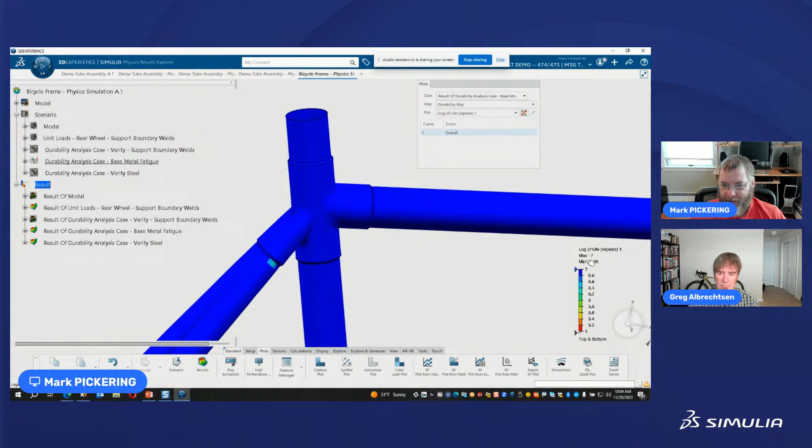And we just do a base metal fatigue analysis of it, and we get a little region here. That's the only region that actually lights up on this particular connection at all. In here, I've already scaled the contours so that 5, and we're looking at log of life. So 5 is what, 100,000 cycles. So what does that mean, log of life? How do you interpret that?

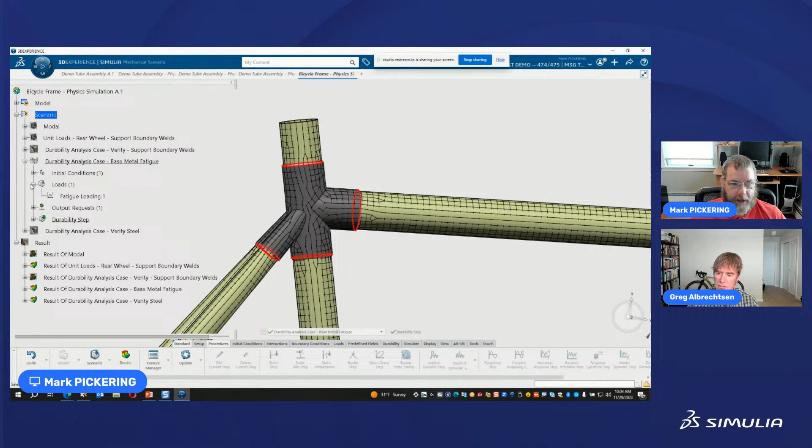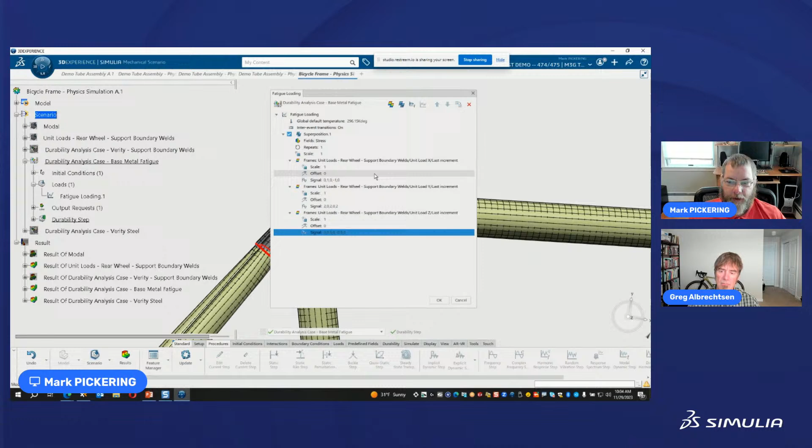Yeah, so that gets into a little bit of what the load case will be. If I come back here into this scenario and bring up the loads, we've got the fatigue loading. I've got a particular event cycle, which has one load case cycling through with this signal, another load case cycling through with another signal, and another load case cycling through with a third signal. You can see they all have 1, 2, 3, 4, 5 data points, but they vary in X, Y, and Z.

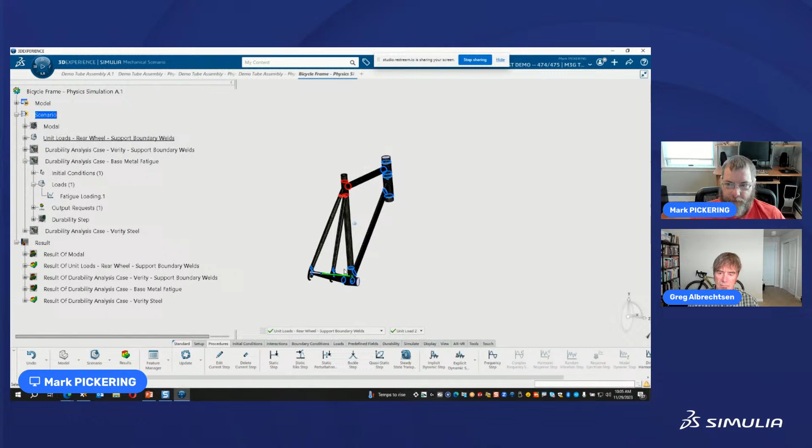So if I zoom this out a little bit and go back to the unit loads, I've got a load in X, and if I switch to Y, we've got a load in Y, and then a load in Z. These are the basic FEA load cases for which we have just stress and strain within the model. What I've done is taken the approach of assuming we'd actually gauged up this rear axle of the bike, done some particular event like driving down the road, going off-road, doing a jump, or whatever you're interested in, and tracked that data as a time history of what happens in the X force, the Y force, and the Z force.

And so when I go into the durability and look at this thing, I'm saying, okay, this signal - I actually just typed in these numbers, but it could have been that data trace. And then I'm saying, okay, so we've got the X force on this rear axle. That's all of these frames. And this is what we're calling superposition.

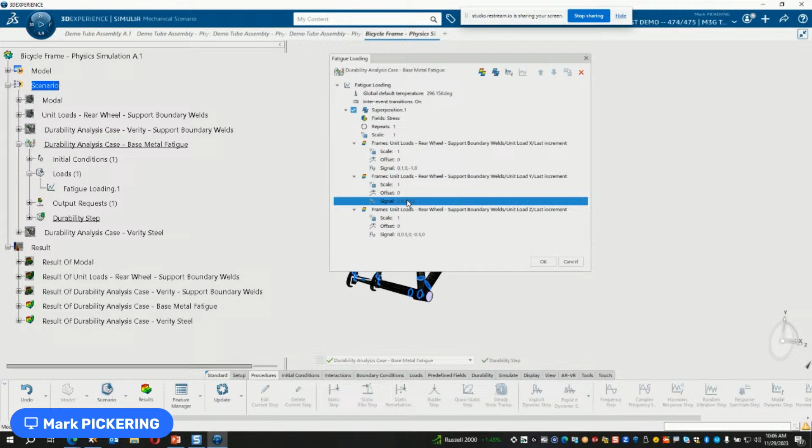So this is going to be applied and is going to multiply by that unit FEA stress. And then I'm doing the same in the Y direction, because obviously we recorded X, Y, and Z all at the same time, we've just pulled them out into separate channels. So here we're just combining each of those channels with the stress value for each of the unit load cases. Each one relates to a different static case over in the simulation tree.

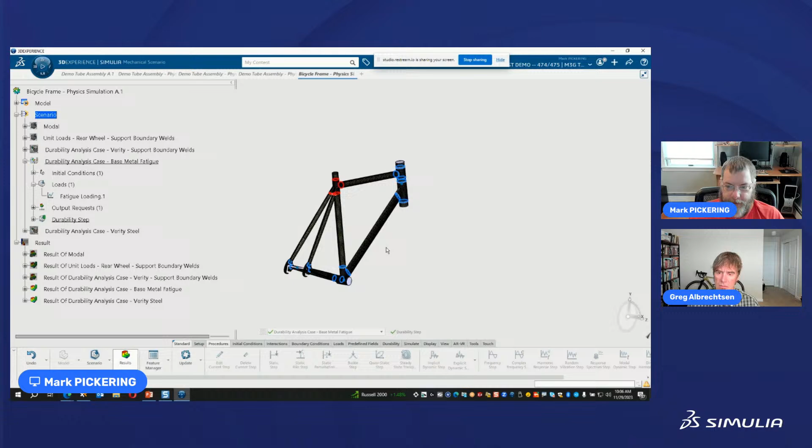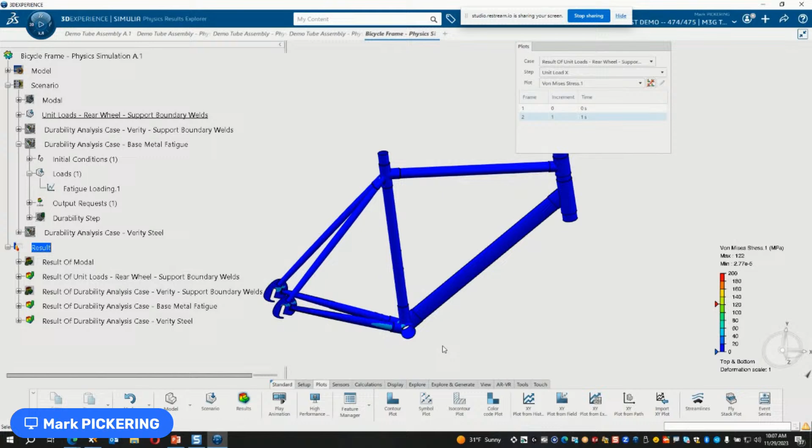Okay, so if I go into results again, we can actually look at those. We've got a Z load here with a particular stress on this. We've got a Y load with a particular stress on there. Seems like it's concentrated on this area, so no wonder it's not causing a lot of damage here. And then an X load with some little concentrations around these particular bits. So yeah, just regular static analyses that we've combined together, and when we then go into the fatigue loading, we're putting these together. Here it's just 5 data points, basically a sinusoidal curve, fully defined.

And do those have to be like a static perturbation, or can they be nonlinear with nonlinear geometry? So it depends. A lot of fatigue analysis that we typically look at tends to be fairly high cycle. So here we were saying we wanted 100,000 cycles. If you're repeating something 100,000 times, it tends not to be very nonlinear in terms of the material.

So it does tend to fall into what would be a linear analysis, a linear perturbation analysis. As you get into lower and lower fatigue, then you will tend to get a little bit more macroscopic level plastic straining going on. And so to do that, you would actually want to have an analysis that went through one cycle of that and was a fully non-linear static step.

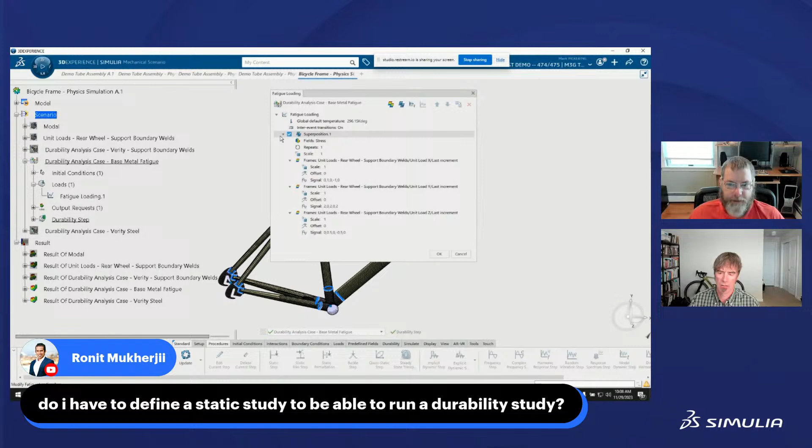And we've got 2 options here. At the top, we can see, in this first block, I just made a superposition, which was the X signal, the Y signal, the Z signal with those unit load cases. I could also go in here and do a sequence of frames and say, okay, if we'd had, say, a dynamic event which was actually fully non-linear and did develop a certain amount of non-linear plastic straining, we could come in and say, event 1, all increments, all except.

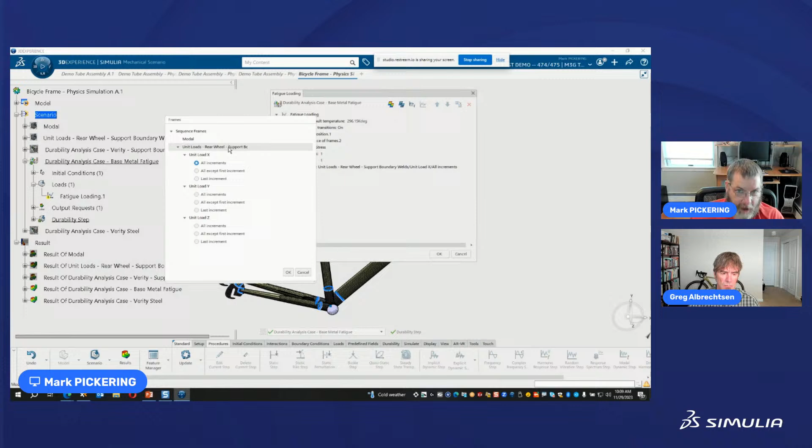And what we're doing here with a sequence of frames is we're defining a loading event, which is a bit like an animation you'll often see, where it goes frame 1, frame 2, frame 3, and it's cycling through those to form the animation, and you can see whatever the thing is deforming. But we're actually tracking that from a damage perspective in terms of accumulating fatigue damage.

So we could go ahead and do that, and this is getting now a bit - we're getting way off topic for what... see, we're not even 10 minutes into it.

So we do have a quick question. Keeping me on track here, not encouraging me to go down.

But I will get into this, so we'll carry on down this rabbit hole. It is kind of important. Basically, the theory of what's going on in fatigue analysis can be quite complex and can be quite involved. People spend their academic life just studying this stuff. I'm not one of those people. I'm more of a user, and I want to use the clever stuff that they've done to be able to drive an engineering decision on, should I go for bike frame A or bike frame B?

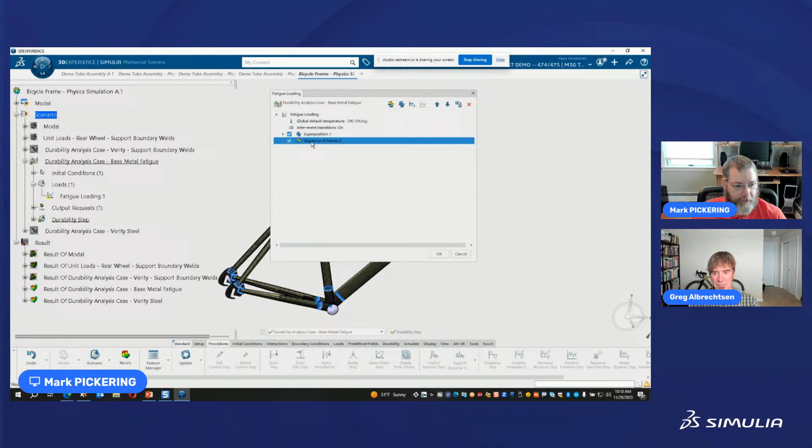Which one of these seems like the better one from a fatigue perspective?

I do care a little bit about the theory, I do care a little bit about the understanding so that what I do actually works, but I care more about how do I actually put this into the software and use it.

We know the whole adage of garbage in equals garbage out, but the software is so good nowadays that as long as you have a good engineering background and you're thinking about what you do as you go through, it can do a lot of stuff that you have limited knowledge on.

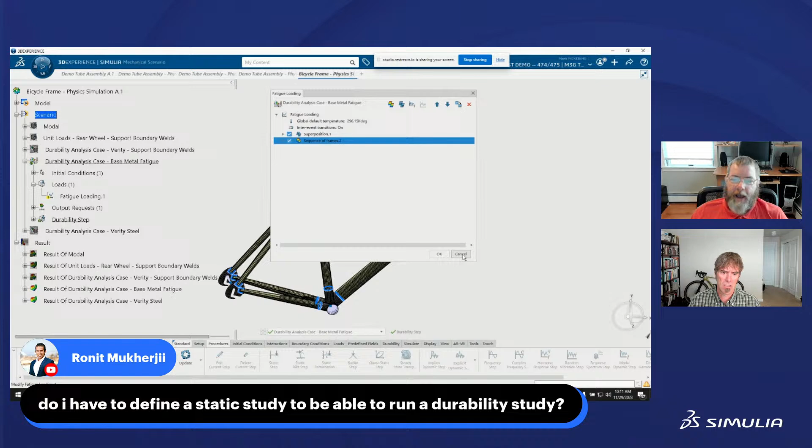We do have a question from one of the people, and I think you may have hit this. So can you just directly define a durability case, or do you have to define one of those other cases first? Let's hold off on that question just for a little bit, because I want to do this bit first and then we'll come to that bit second. Okay, carry on, back on track, back down the rabbit hole.

So what I wanted to do here was, we've seen in here, I just put in this second sequence of frames, and we call these blocks. So we've got a block here, which is the superposition, which is the XYZ combination with these signals. And these signals could have been a data file instead of just typed in, and typically that's what you would do if you had test data. But this superposition, for instance, we could say that that is

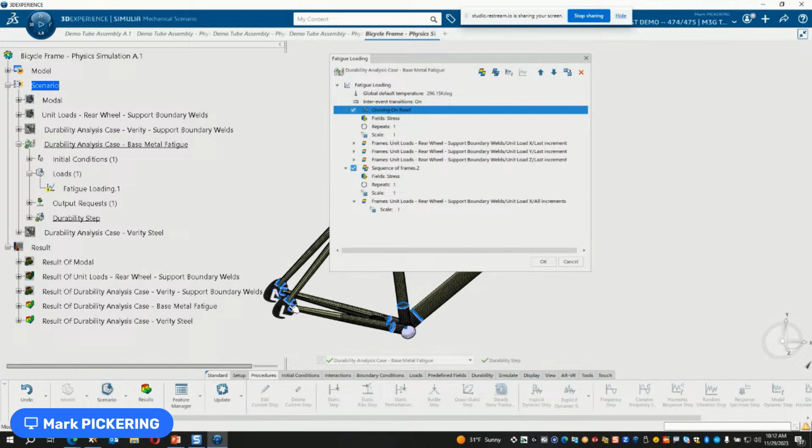cruising on road. And this might be like an hour's worth of test data where we've been monitoring the XYZ of what happens with this rear axle going through this, somebody cruising on the road. And then this particular one could have been something different, where maybe this was, let's say, a bunny hop jump.

And in here, we've actually simulated it inside the FEA, it's not taken from test data. We could have test data and going through these things, but this is where, as a user, you will tend to spend most of your time for a fatigue analysis.

And this is like, what, 10 minutes in just to get to your first question. You asked about what does log of life mean when everything repeats. But anyway, so what this is doing is defining our history. So we could have like an hour of cruising on road, 5 bunny hops, 25 minutes of off-roading, whatever, something

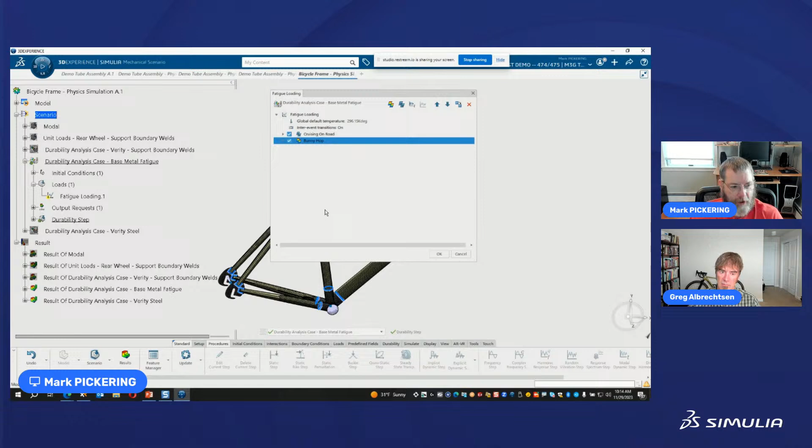that defines a particular load cycle that we want to analyze for, and we want to define the durability for. So if we've got an off-road bike, maybe there's less cruising on road and more off-roading, and if we've got a road bike, it would be vice versa. But the idea would be you'd set up a particular set of load history. Often it's done for like a mile, or for an hour, or for maybe the actual design life of the structure.

And that would be all of this history that we're going through is what we will calculate the damage for. This is probably going to complain about being out of date. Oh, no, it hasn't, excellent. I must have cancelled that.

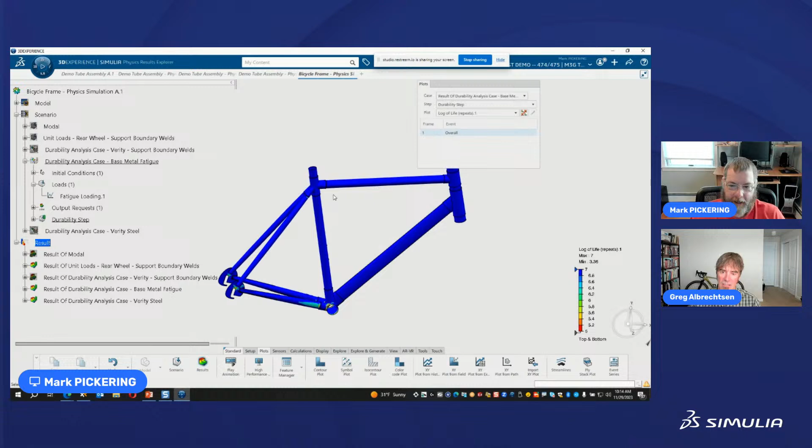But then when we come into this bit and we said, okay, we're looking at the durability, this bit at the bottom obviously lights up the most, but for here, we're just concentrating on the top.

And then I said, we set this up for 5 as a log of life. So 5 is 10 to the power of 5, so 100,000 cycles. Just remembering my basic math. So 100,000 cycles is what we're looking at.

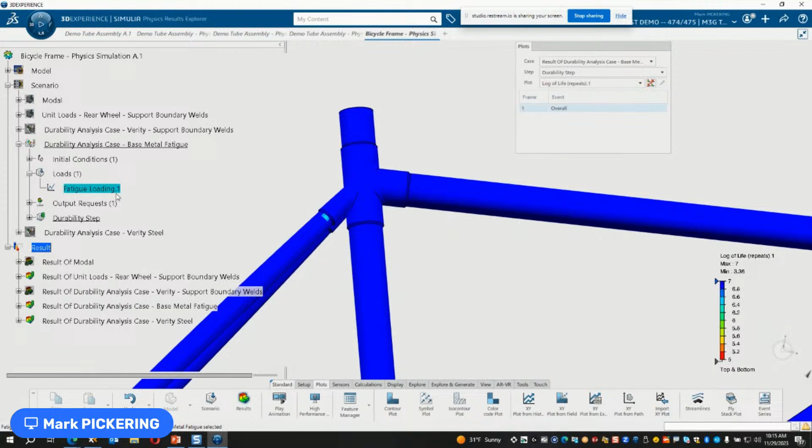And it's 100,000 cycles of that fatigue loading that we defined back here. So in this particular case, it was that 5-step cycle in the X, Y, and Z loadings that interacted in some particular fashion. But if that had been an hour's worth or a mile's worth of riding, then this would be 100,000 miles worth of riding is what we're aiming for as our design life.

And we would look at this from a base metal fatigue and go, yeah, it looks pretty good. That's maybe, what, 6.5 here? Again, in log of life. So we're talking million plus cycles.

And this is kind of getting to where I was ending up with: if we actually weld, you can analyze this, because this is just FEA, as base metal fatigue. You're just applying that algorithm and setting it up here. We do actually have in 3D Experience this Verity approach, which actually looks at the welds, and welds tend to be detrimental to the fatigue life.

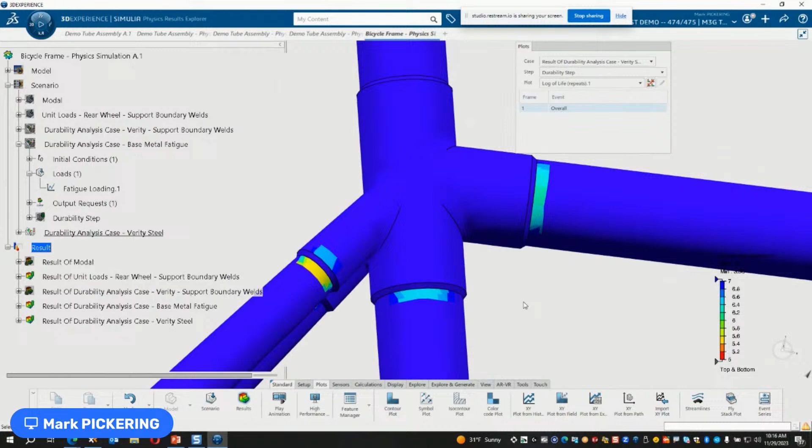So this is what I wanted to show initially, where we've done exactly the same thing here, but I swapped out and included the Verity calculations. And we can see that the life has dropped significantly. Now we not only have this one point that is below 7, which is typically infinite life in these analyses, but we can see other locations lighting up too. So there's more areas of concern as a weld, and now we're dropping down to 5.4, 5.5.

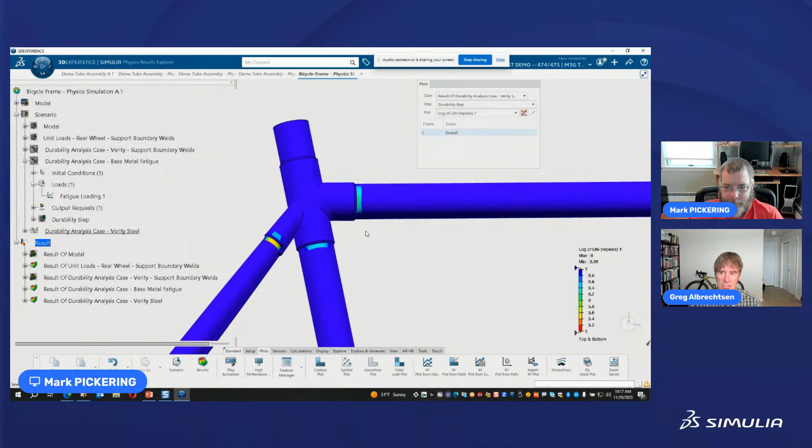So this log of life value, if I remember, is like a log-base-10 criteria. So if I have 10 to the x, that's what that number represents. That number right there is the x. So if I really want to understand the cycles, I do 10 to the x, like 10 to the 7 or 10 to the 5, and that will show me what my number of cycle predictions happen to be, right?

Yeah, this is maybe a bit of an artifact of the way people who study fatigue deal with this. With fatigue you're typically looking at very long lives, you're interested in 1 million, 10 million, 100,000, 10,000 cycles. Plotting those out on a graph in true scale, you just get swamped at the end, but you're actually interested in how it develops over those orders of magnitude. So they tend to look at it this way, and because a lot of that comes from the theory, this tends to be the default way we look at it. But you're right, 5 here is 10 to the 5, so 100,000 cycles.

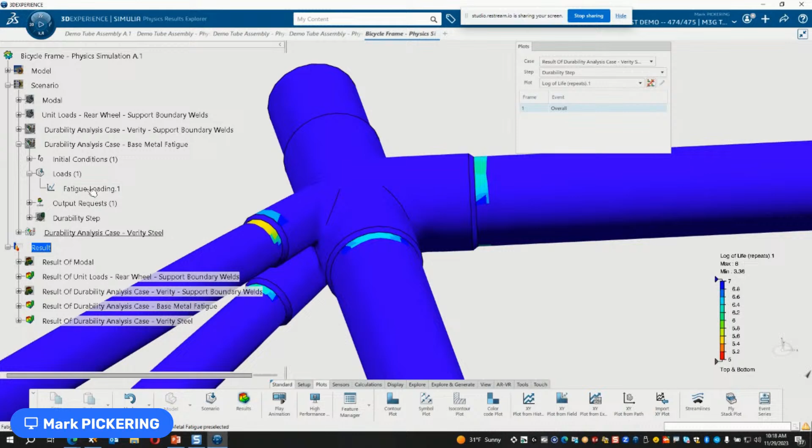Okay, back on track, out of the death spiral.

Getting to 6 on this green level is 1 million cycles, and 7 is 10 million cycles. So that's the way to think about it, and each of those cycles is that fatigue loading you defined. Okay, so this was the first thing I wanted to say, and we probably won't get to why welds are bad, but if this is of particular interest, the main takeaway is that there are techniques in the software which account for the damage changes that having a weld in the structure causes, and they reflect what's actually going on in the practical sense. It's a word of warning that if you have a welded structure and you're just using a base metal fatigue algorithm, first, I admire that, it's good, it's definitely better than just doing an FEA and looking at stress. But secondly, it's not quite the whole picture, you're still missing a change in the damage mechanism that goes on with welds. But there is software that can do that, and coincidentally, 3D Experience is one of those softwares. Now that's kind of the wrap up of that first bit I wanted to do.

And then I said we'll leave that question for the second point, and I've forgotten what that second point was. Surely you hit it already, so I think we're good. Are you telling me you've forgotten it as well? Oh, dear.

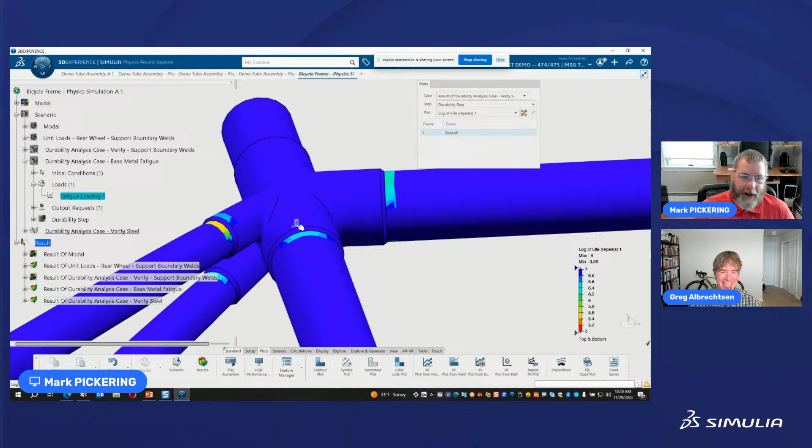Oh, it was about setting this up. Okay, yeah, let's do that. Let's do a bit of setting if you have to set up some sort of simulation case beforehand. Yeah.

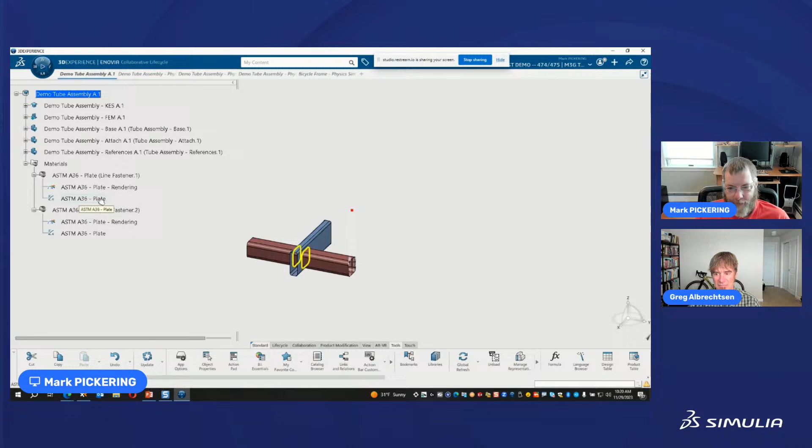So the first thing I'll do, again, we're skipping a lot of stuff here. One of the nice things about the way that fatigue is handled in 3D Experience—and I mentioned the theory can get quite complicated, the concepts involved can certainly get quite involved—I said I'm more interested in a user perspective. The main thing that you need to be aware of, apart from setting up the load history, is that there is a material database supplied which has fatigue properties in there.

That can be a little bit surprising for a lot of Abaqus users, because historically Abaqus has been very much just the finite element framework, and people had to bring their own material data to it and populate a material library. With fatigue, there's just less generally known information about fatigue, and certainly less information about representing it in a strain-based approach, which is one of the things that FE-Safe and 3D Experience have, which we may or may not get to later.

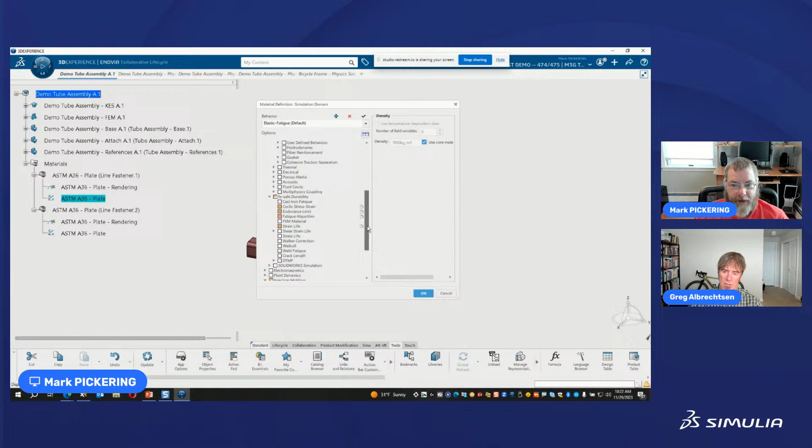But the nice thing is, from a user perspective, if you load up that library of materials, it will have the classic elasticity, the Young's modulus, the density. But then if we scroll down here, it will have what has been predefined—seems to be the best way of representing that material based upon the fatigue expert's perspective.

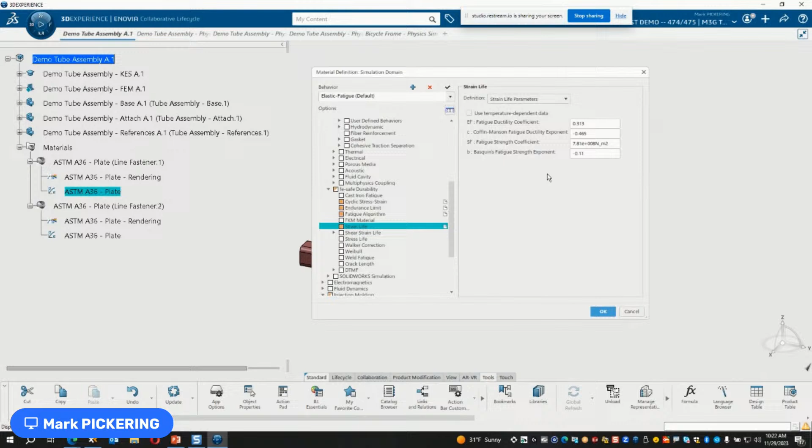Often it will be something like this. So we go into the FE-Safe durability. In here, we can see that we're doing a Brown-Miller. We're not going to worry about all these details. The key bit I want to get across is just that the algorithm that we're using has been predefined, and then the coefficients that define the use of that model have been predefined and populated in here. So from a user perspective, all you need to do is use that material in these parts.

So we can see here, there's that material being used in this base tube. And I have to plug really the power of 3D Experience right here. There are so many things that we get in 3D Experience as simulation users that were put in there with simulation in mind, but really just the whole database concept of one source of truth. With other software, you have to import the material and recreate it every single time. But here in the database, there's one material and everybody gets to use that same material—you don't have to go in and recreate it. And that works for everything in the database, but materials in general, it's super nice and really powerful.

So then you don't have like 40 7075 aluminums out there in the database, and you're like, I don't know which one's mine, I'm going to go ahead and recreate another one. You can just use the one that's been put in there and start using that. So anyway, all right, carry on.

And I'll say as well, coming from an Abaqus perspective, as well as other FEA software which typically is unitless, the fact that you're working in a unit system and you don't need to care about that—because the material has got a particular unit system in here—and the program does the conversions on the fly that it needs to. If you're working in imperial, or if you're working in metric or millimeters, that is just really nice.

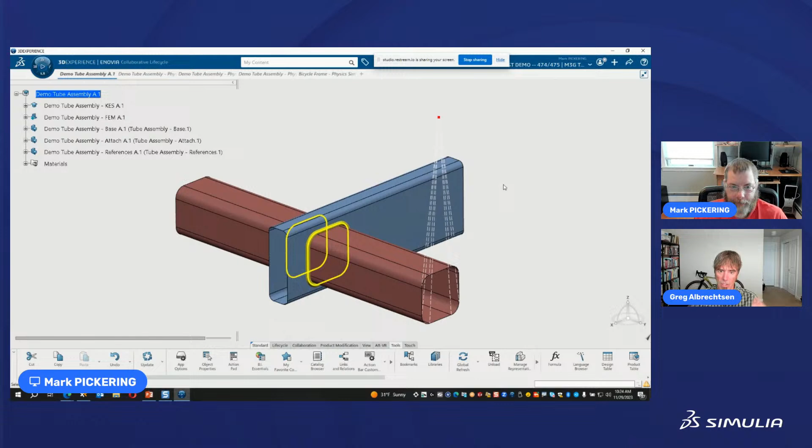And you can even—so the base units of 3D Experience are SI, right? That's the base units. But then we have what I refer to as display units, and you change those in the preferences. So if you want your display units to be inches or millimeters, you can change that in your preferences. But if I'm working in my millimeter display units and I know something's in inches, I can just type that in and say inches, and it'll automatically convert it to millimeters for me. So there's all this smartness going on behind the scenes with units.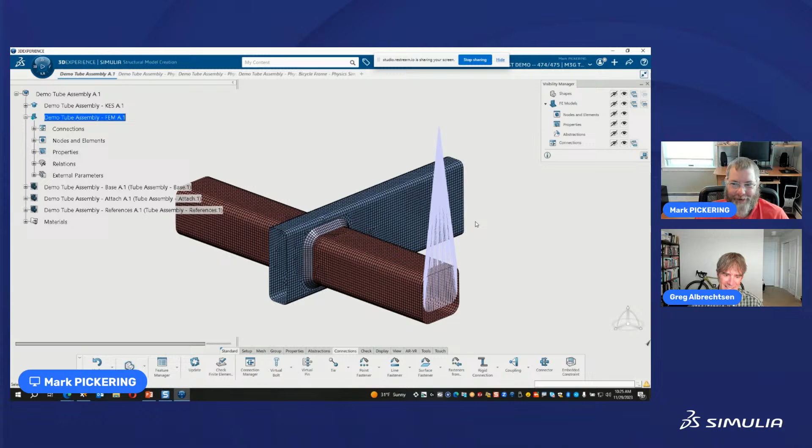So for the unitless world out there, it's a huge game changer. For us that are used to working in CAD packages, we're like, yeah, well, whatever. Blatantly obvious, why wouldn't you do that? Yeah, all right, but yeah, so what I wanted to do is showing.

Okay, let's get into a bit about how as a user do we set up a durability analysis. So I've got here what was a solid model that I've mid-surfaced out, and then I've used line fasteners here inside 3D Experience.

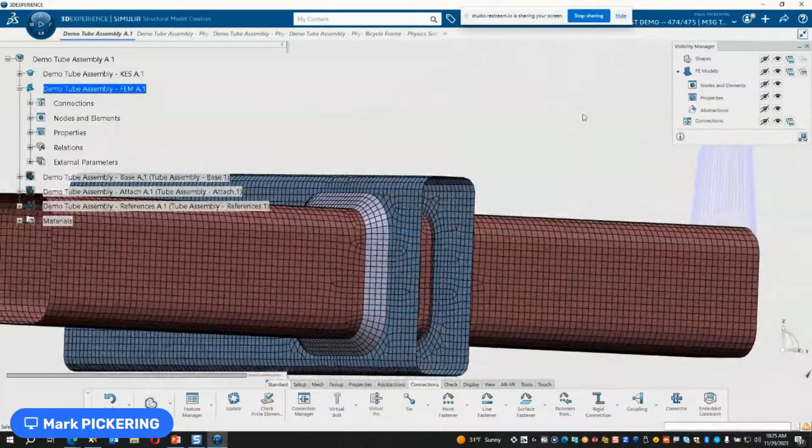To connect these together, these are the sort of purplish elements. And if I do a free edge plot, we can see it's fully connected.

So we've got an attachment tube, we've got a base tube in red, we've got this abstraction to a loading point up here, which is where we're going to put a load in to then stress this structure up. And then we've got the line fasteners representing the welds here to go in.

What I'll do is come in, so here I've got a physics simulation. In this physics simulation, all I've done so far is set up the FEA. So if I come into here, we can see that I have got... where are we?

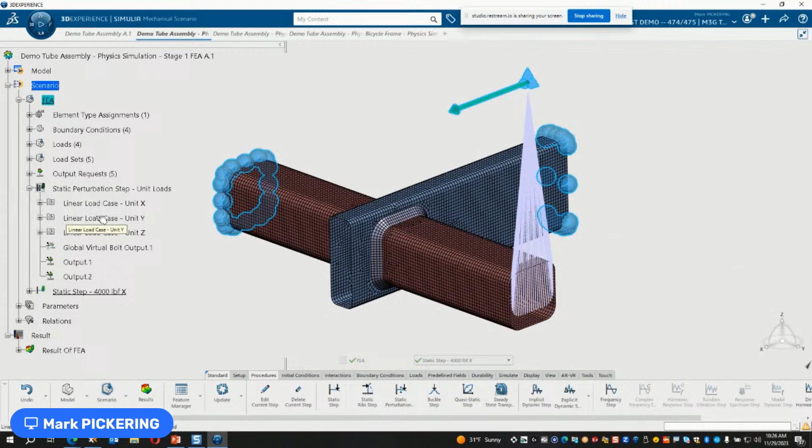I've got, actually, so talking about what you mentioned before about does this need to be a linear static or can this be linear static? I actually have in here an XYZ unit loading situation of a linear static perturbation set of load cases.

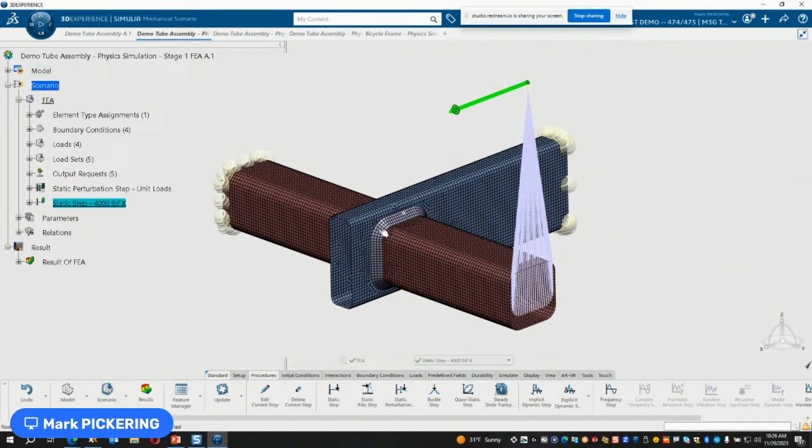And then I have what we're currently displaying, which is potentially the non-linear, but is actually just, you know, we're applying 4,000 pounds force here, and then that's going to create a twisting and a shear motion in here, stressing this up. And so if I go into this, we can see, okay, so this is our stress and strain, or our stress plot.

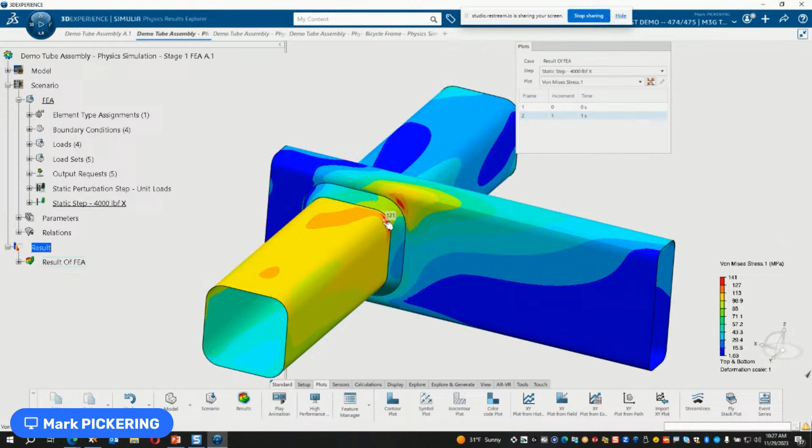In this particular setup, we're lighting up this sort of free floating section first, more than the other sides. But we can see that because of the weld, we are tending to concentrate on this corner, with a little bit of a concentration on this other corner.

So you're just creating a regular simulation case, and you're putting that into the durability. Standard FEA, static step, nonlinear geometry, all defaults basically set up.

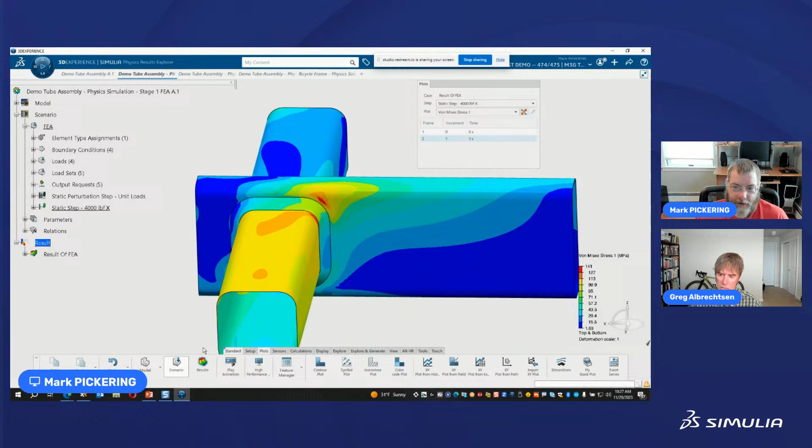So if I want to look at this, and we sort of said already in that scenario, okay, this is our applied load. Now, one of the things in durability is you need a cycle of load. If it was just literally, we have this structure and we push on it with 4,000 pounds force, and then we hold 4,000 pounds force forever, there will be no fatigue damage.

It needs a cycle. So that was kind of what we were showing before with that superposition and the sequence of frames, and then the blocks and building up a really complicated, potentially, cycle.

Here we'll just do what is sort of the classic durability people's approach of fully reversing. So 4,000 and then minus 4,000, so we're cycling back and forwards, creating damage as we go through.

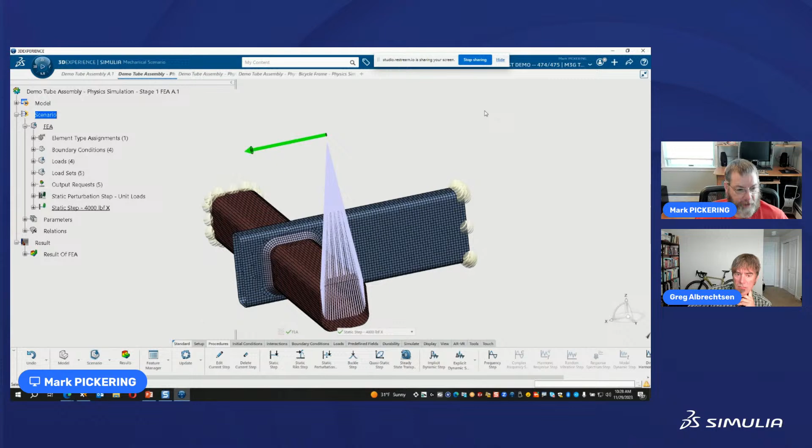We don't need to analyze the minus 4,000 if we assume that these are sort of linear enough that minus 4,000 is just minus 1 times this. If they were not the case, like if there was something like maybe a contact patch that comes in, then yeah, we could have a push 4,000 forwards and then a pull 4,000 backwards and do that as a sequence of frames. But for right now, we'll just take this idea and say we want to cycle plus or minus 1 of this 4,000 load case.

So how do we go about that? We have a really smart question here. I don't even know what this is, but can we use Wöhler curves?

Yes, and that's kind of the bit that I've already skipped because we got derailed down this rabbit hole already. So Wöhler curves, they actually, let's see, shall I skip into it? This is kind of important, I guess.

Everything's important to you. Yeah, that's maybe true. It's important to me, my thinking of it.

One of the things that I like, this comes up not necessarily... I guess the first thing to do is just answer the question. The answer is yes, you can, basically, simplistically. But now I want to do what I usually do, which is expand upon that to a painful degree.

So the way that I often think about fatigue—and this is getting into approaches of fatigue and where one benefits and one has pros and cons of each—the way I like to compartmentalize that is actually by looking at the history of fatigue.

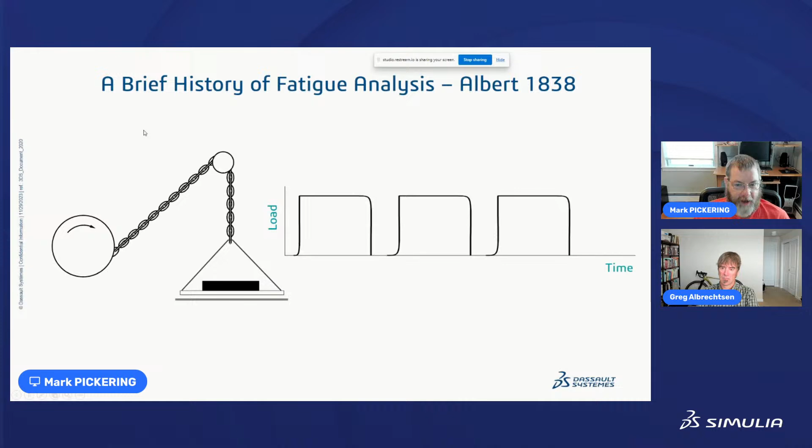Albert was one of the first people to actually go through and look at this. He was looking at chains on mining equipment, lifting up and dropping down cartloads of coal or iron or whatever they were mining. He realized that chains were breaking after a certain amount of time while never experiencing a load as high as that critical ultimate load they could carry. So he developed a rig like this and started testing chains at different load levels.

And he started coming out with this. Now, this isn't a Wöhler curve—this is specifically for a chain—but it is kind of the first case we have where people are realizing fatigue is a thing. It's a definite damage mechanism, and most importantly, it's a damage mechanism that occurs at load levels that can be significantly lower than the ultimate applied load a structure can take.

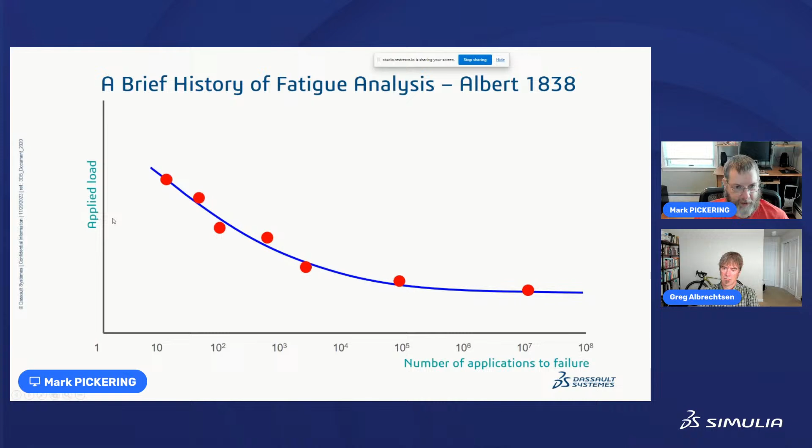This is great, but it only works for the chain—only for the chain that Albert was testing. If you had a different chain, you'd have to do all these tests again to work out what the applied load should be and when you should replace that chain before it fails in fatigue. And that's the pros and cons. I'm skipping through here.

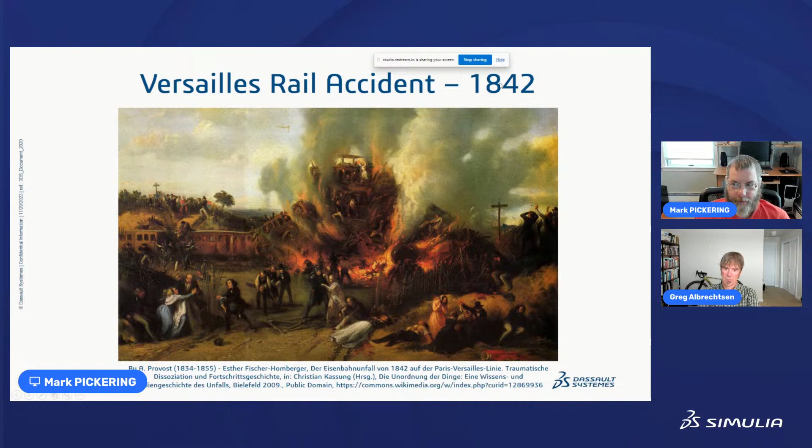Unfortunately, in the history of fatigue, a lot of things occur because of accidents. This was the Versailles rail accident, a major accident in France, and I think was probably the worst rail disaster ever at the time. We're talking back in the 1840s when this occurred, but this is when Wöhler started looking at fatigue and trying to come up with what was happening here.

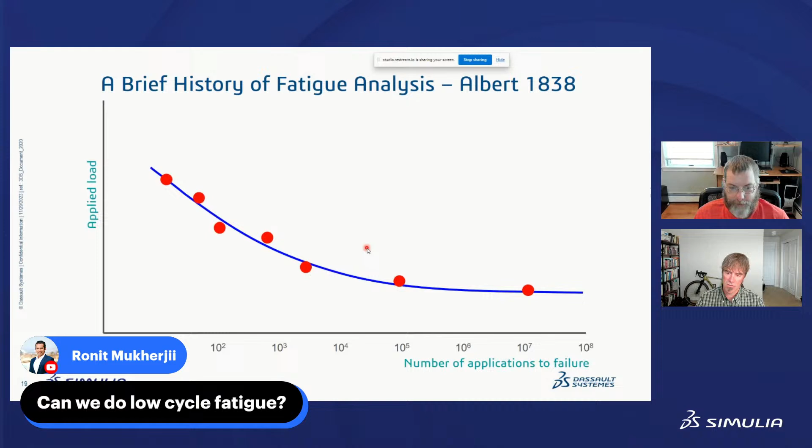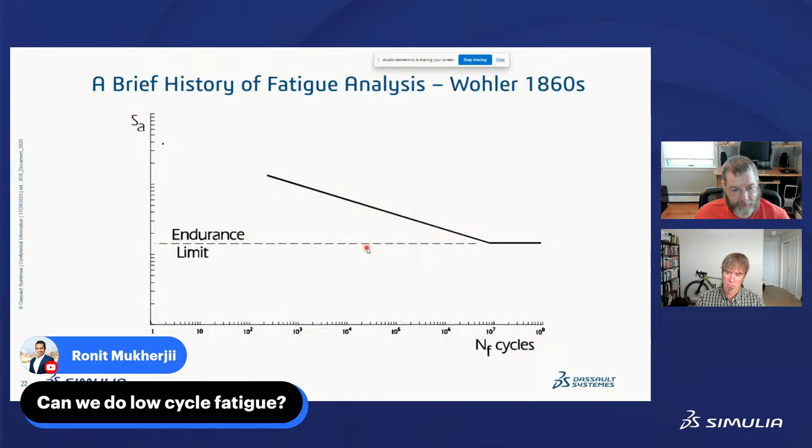That's very helpful because even though he was looking at railway axles, that was what he was concentrating on, we can determine the stress locally on a wide variety of components. Where Albert was like, well, I've got this curve, but if you're not doing a chain and it's not the same chain as I've looked at, it doesn't really help you. Here, so long as you can get to a stress, you can then use this material data and get to a fatigue life. So that was great.

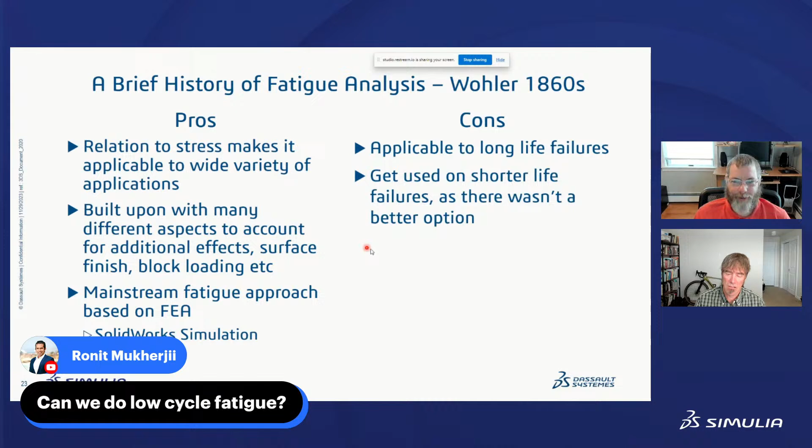So this is all about high cycle fatigue. What about low cycle fatigue? Yeah, and so that's where we get into my cons. So all right, there you go.

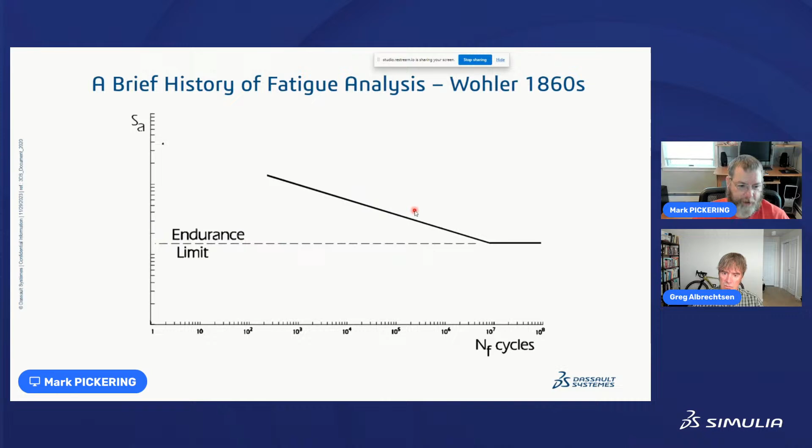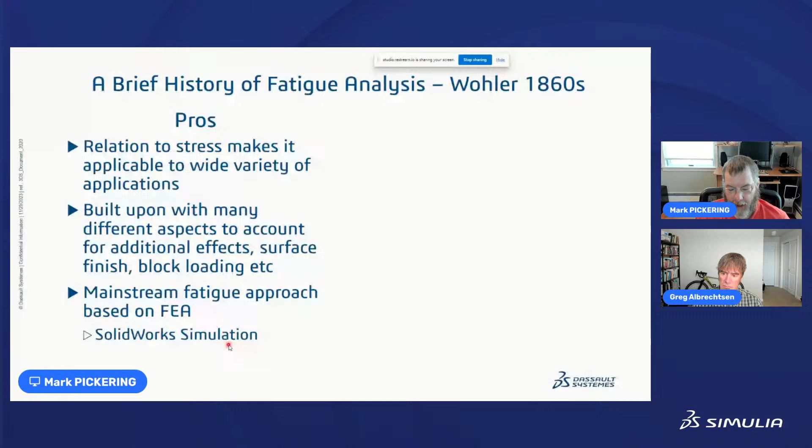The pros are great. One of the things to bear in mind with this approach is there's various modifiers you can do for mean stress and other things that over the years people realized influence stress as well, which do tend to be included. This is the stress-based fatigue. It has been very common in fatigue analysis programs, including things like SolidWorks simulation, which uses a stress-based approach. And you can do that in 3D experience as well. The drawback, though, is it was really focused on long life failures.

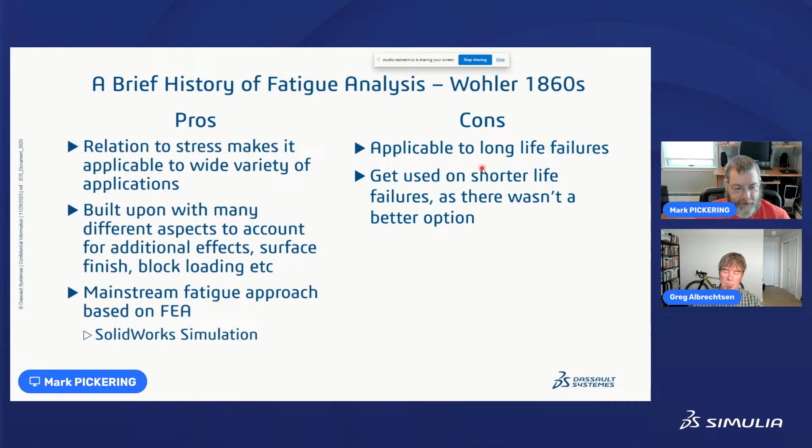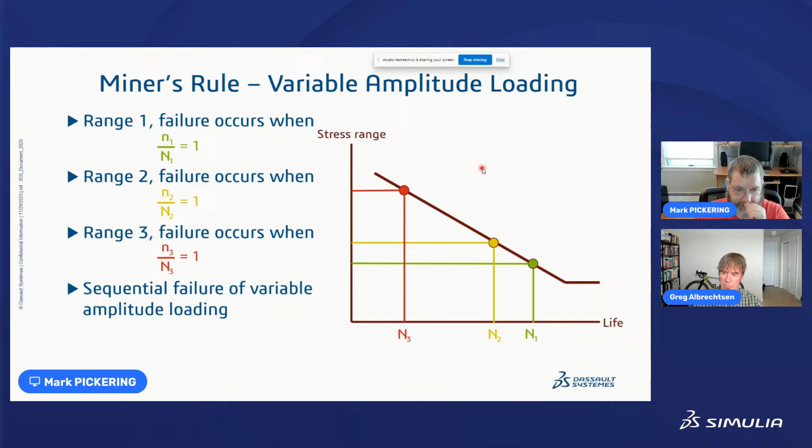And when you get to shorter life failures... oh, hang on, I've got some other stuff here. So what was I doing? Yeah, so this is just a little bit of extra stuff. These are all variations or manipulations of the stress-based approach to take into account different things, some of which are better or worse than others.

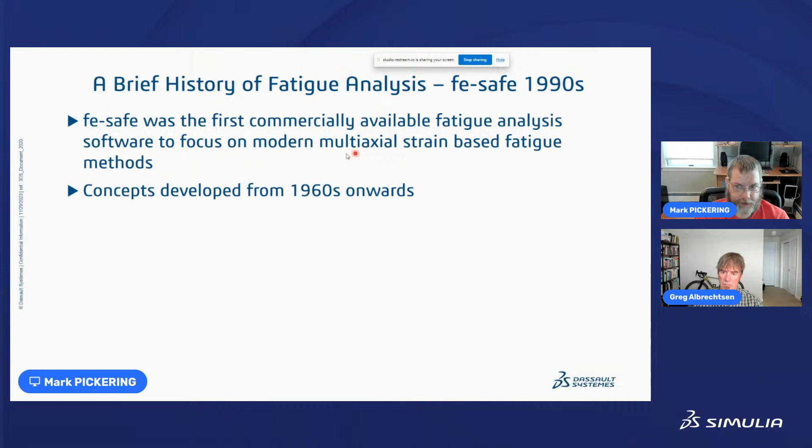But where I want to get to now is FE Safe. And FE Safe, or Safe Technology, were not the first people to do this. They were the first people to put it into a commercially available fatigue analysis program. And there's really two things that they based this on: one is multi-axial loading or multi-axial response, and one is strain-based.

So what are we talking about here for strain-based? This comes down to, if we think about the component for Albert and his chains, and then for Wohler, we're thinking about looking at the stress on a railway axle, but it could be the stress on anything - that's the stress-based approach. But you're looking at that macroscopic level of the structure. And fatigue damage occurs at the microscopic level of the crack itself.

What happens is that in order to accumulate fatigue damage - and this is getting into that endurance limit kind of idea - at the crack tip there needs to be enough stress generally that when you look at the crack tip with the stress concentrations of the geometry of the crack tip, it will cause plastic deformation at the crack tip, which is then a permanent extension of the crack that is helping that crack grow. But we're not looking at the crack tip there - we're looking at the macroscopic level of the stress of the structure.

And this is where we now get to the strain life approach. These were developed in the 60s - basically people were looking at these in a university academic environment. And it was this work that was then brought in the 90s into FE Safe as a commercially available product.

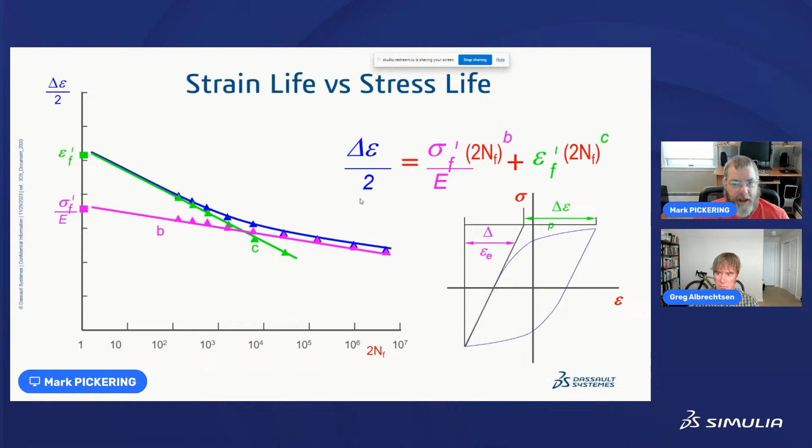One of the things that comes up is when people start hearing about strain life approaches versus stress life approaches, the question is, do we need to be analyzing the FEA differently in order to use this? The answer typically is no.

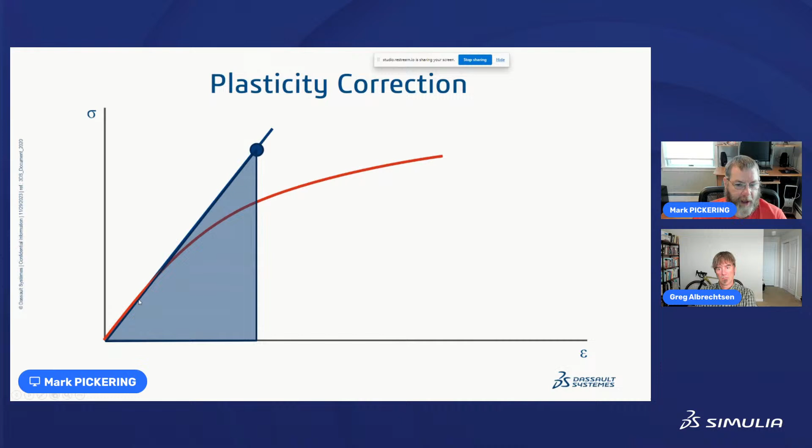In a stress-based fatigue approach, you do an FEA and get the element level macroscopic stress of the structure. In strain life, we're looking at the crack tip, so what we typically do is a plasticity correction: if this blue is the macroscopic level of stress, it gets corrected to the crack tip level of elastic-plastic stress. There's a variety of ways to do this, but we're getting into theory rather than practical application, so I'll just say there are alternative methods. FE Safe generally uses Neuber's rule because it tends to be the most conservative and matches up with practical tests we've done.

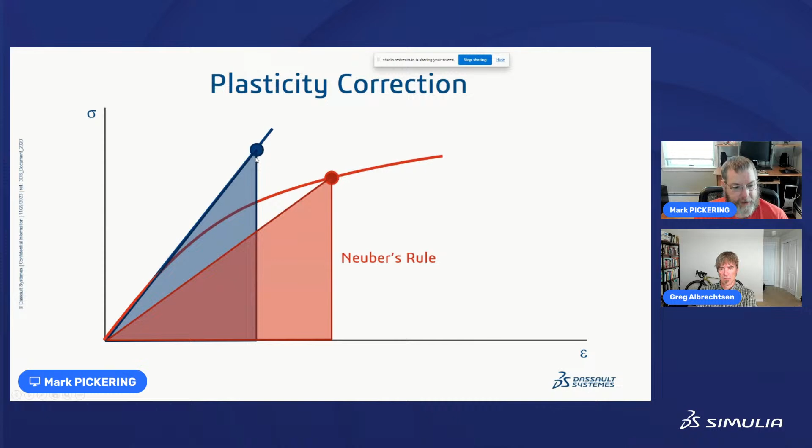But what this means is, because we're doing a plasticity correction of the macroscopic level finite element stress, you don't need to do anything differently.

That's where I was getting to with this approach. If we've got a stress and strain response for this static step and I want to set it up as a durability analysis, I can just come in here—we've got our FEA analysis case, so we create a durability case. Then we have our initial conditions, basically a global surface finish, which we can keep as default (mirror polished) or choose a particular machining set. We have our output requests, our durability step, and in the durability tab, that's pretty much it. The only thing missing is the algorithm override.

If you want to use something different than the material set up earlier, you can override it here. For example, the question was, can we use an SN curve? Well, if you set up an SN curve, you can use this algorithm override to choose that instead of the default strain life approach.

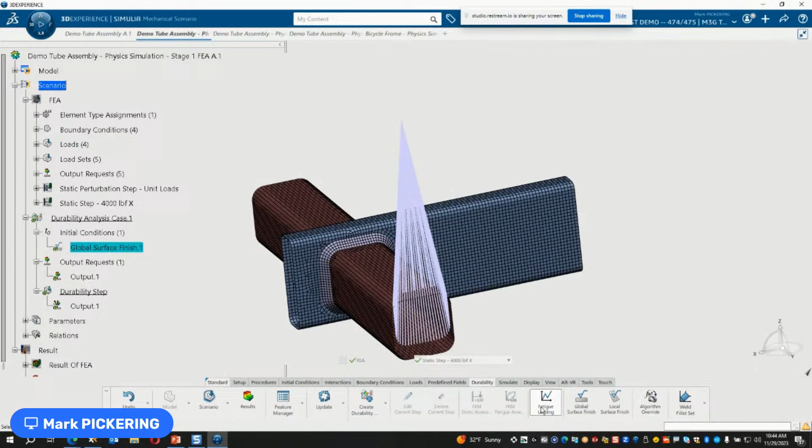The other thing is the fatigue loading, where we go in and say what our history is. Since we were just doing a +1/-1 reversal of the static step from the FEA, we'll do a superposition—right click and add in the static step, which was the applied load, then give it a signal value of 1 to -1, which is the default, because traditionally in durability this is the simplest fatigue durability cycle you can have: fully reversing +1 to -1. And that's it—we're all set up to do the durability analysis.

That's it? I mean, this is like 45 minutes to show me 30 seconds of how to set up a durability tool simulation. You were overselling it right back at the beginning. I'm glad—maybe we should have done that at the beginning and just said, alright, we're done, enjoy the rest of your day.

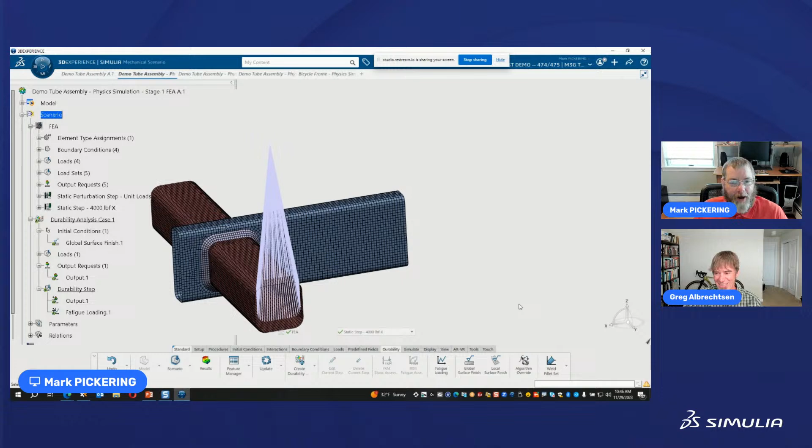Yeah, it's one of those things. In one sense it's really nice to demonstrate this because it's so straightforward. In another sense, it's really problematic to demonstrate because it looks like you're not doing anything. All of the cleverness takes place in the choice of this algorithm, basically.

Like I just went through the history there of Albert and his chain-based loading and the component, and then Wöhler and the SN curve, and that's used a lot. And then you can do all sorts of things with mean stress corrections and things like that.

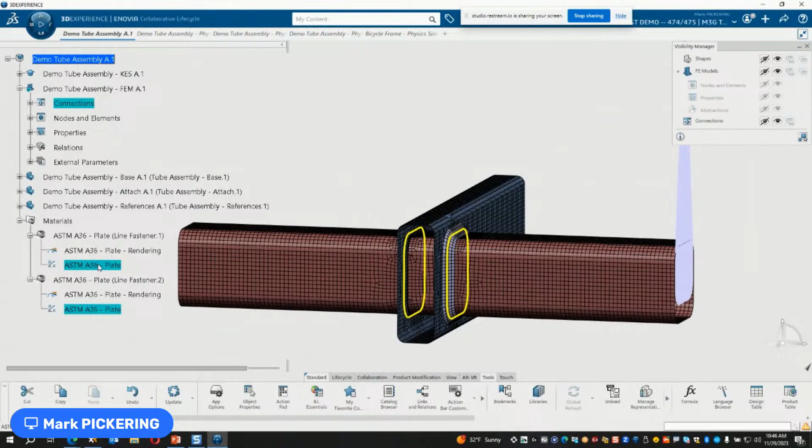The vast majority of all of that is set up just by the material definition. You have an expert who does that once, either uses the library that comes and just accepts that, or for your particular material, we use a library and then say, okay, for this material, we believe any one of these fatigue algorithms is better.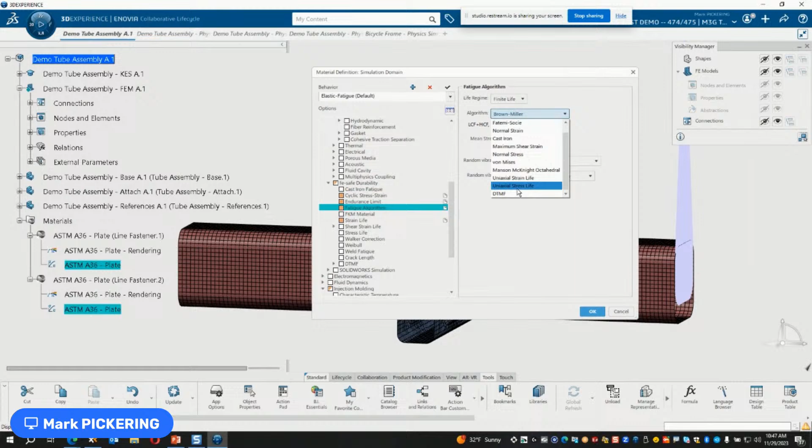And we can see in here, I think we've got stress. Yeah, so we've got uniaxial stress life. So you can do things in here, like start setting things in, Goodman mean stress corrections.

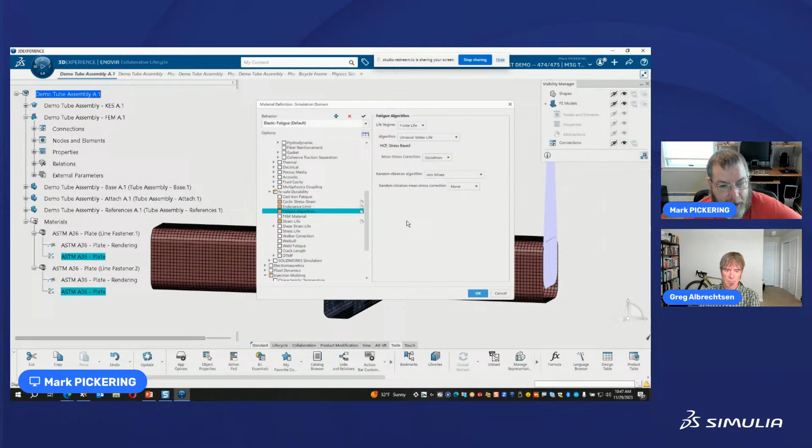Some of these are going to be, if you're not an FEA, if you're not a durability fatigue person, this maybe doesn't mean a great deal. But if you have an expert who says, we don't actually agree with what the Dassault people have chosen as the default, or we've got a material and we want to do it this particular way, they can set it up here. But once they've set it up, you're done. You just pull it in as any other material.

And then it's just that sort of practicality of define your load history, which can be as simple or can be multiple blocks. Like I've seen people do load histories that are incredibly complex, combining in together different cases.

If we imagine a car going around a ring, you could have fast driving, harsh braking, harsh acceleration, gentle left curve, gentle right curve, sharp left curve, sharp right curve. Those could be our components, and you could build them together in a sequence to make pretty much any circuit in the world. And you may well have a load history that is the Nürburgring or Brands Hatch or whatever, and it's just different combinations in different ratios of those core cases.

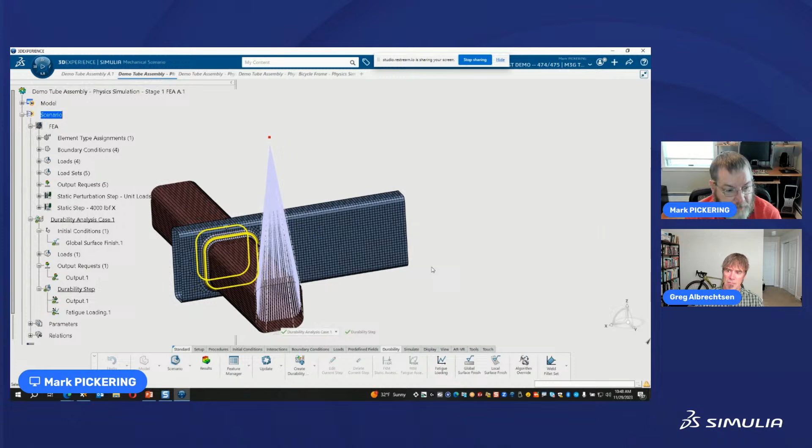So you can create really complicated loadings off this idea of blocks and then particular bits. But yeah, from a usability perspective, once you've got the loading and once somebody has identified what the best fatigue approach is, that's great. The last bit that I'll get to, assuming we have a few minutes here.

Is just a couple minutes. I do like to end a little bit before the hour because I don't know if you're like me. I don't like it when I'm running from meeting to meeting to meeting. Sometimes I like a few minutes before my next one starts. I'll give you a couple minutes here.

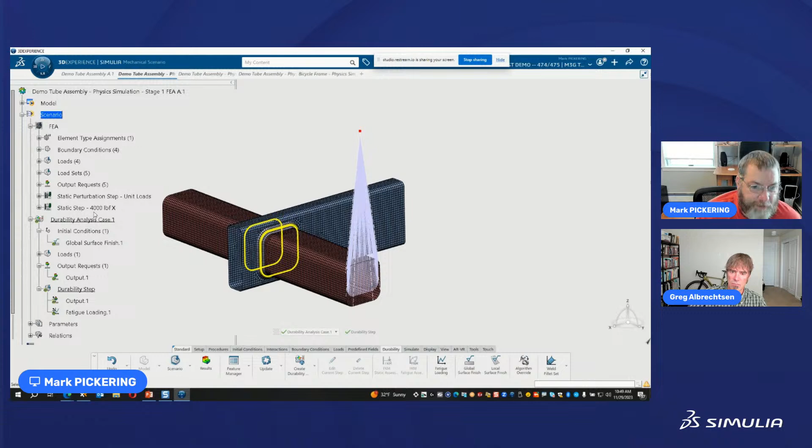So let her rip. The last thing I wanted to show was, I mentioned about what we've set up here is a base metal fatigue. The material itself is base metal fatigue characteristics. I mentioned back at the beginning that welds behave differently.

So the question then becomes, well, how would I set this up for a weld analysis? And I'm currently in this durability analysis case, which is base metal fatigue. What I typically do for welds, and what I did for that bike, is I will duplicate this analysis case. So we'll call this one the Verity one.

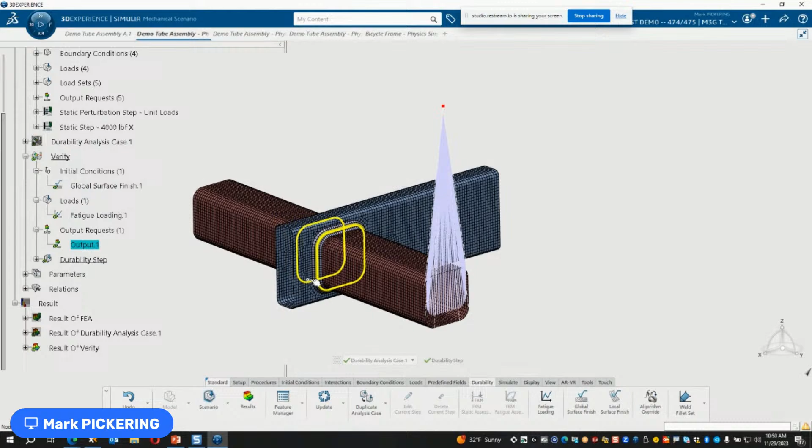And if I just expand these, we'll see it already has the surface finish, the fatigue loading, if we define the output requests, etc. The only thing I need to do differently here is to say, hang on, we've got these welds in here as line fasteners. I want to analyze these differently to just base metal fatigue.

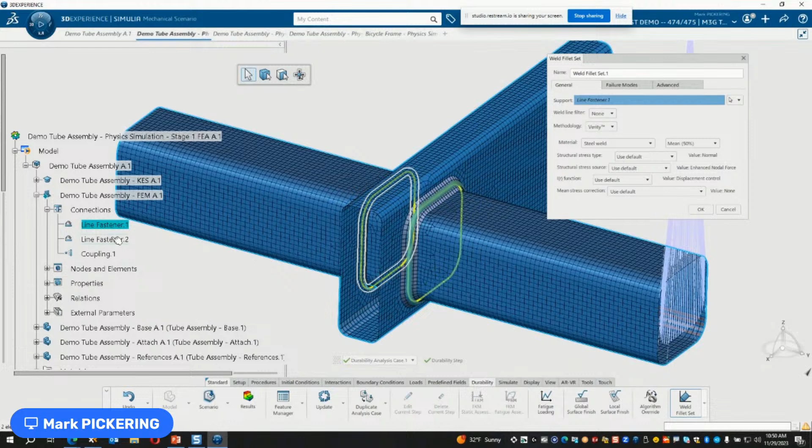The only thing we need to do is come over here and say this weld fillet set. And then it will prompt us, okay, what do you want to use as the weld fillet? We'll just go back into the model. We'll expand this connections, which is where I put the line fasteners themselves. So as I mouse over these, you can hopefully see this highlighting. So we've got the one closest to the load, and then we've got the one furthest away from the load.

And then we say, okay, we don't need to worry about this when we've got particular things, but there are things you can do about resolving toe failure versus root failure versus some other things. But for a setup like this, where we're just using a line fastener, we can ignore that. At the moment, we only have the Verity approach for these.

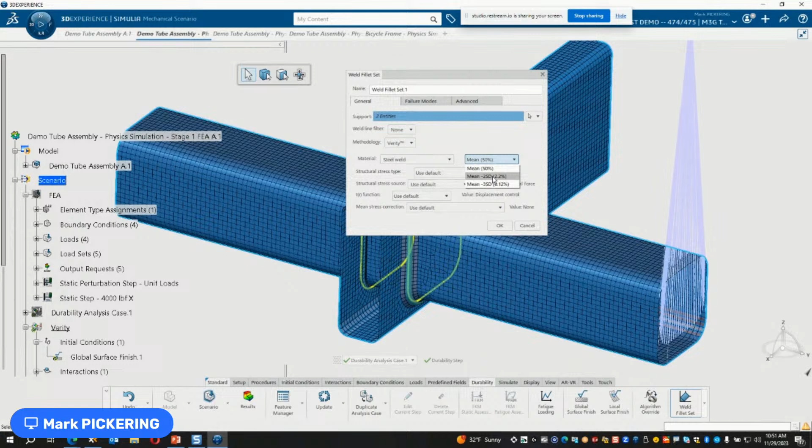With welds, we are looking at either steel welds or aluminium welds. And then what is the percent chance of failure? So 50% chance is the default, or -2 sigma or -3 sigma. And then we can pretty much take all the defaults for the rest of this.

This is probably one of the more important ones. We're looking at toe failures. We didn't get into this, but typically on a weld, particularly a well-sized weld, it will fail at the toe. So that's the default which is on. And we do okay, and we can see that comes up in our interaction here.

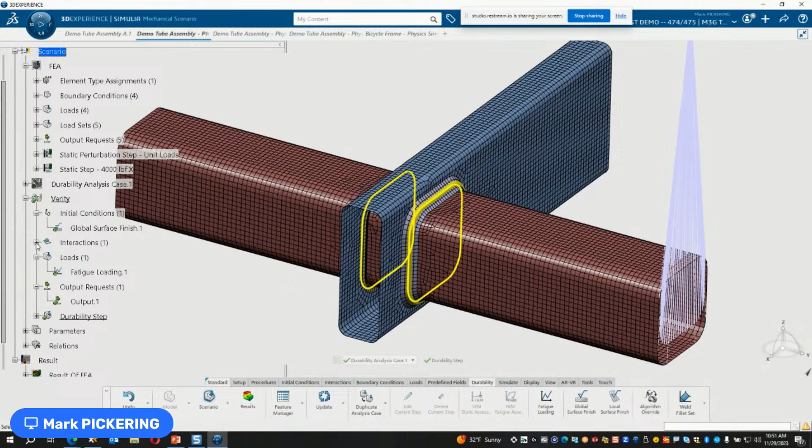Obviously in here, I only have these two welds, but in a more complicated structure, I might have a whole set of them I want to go through. So I could build up lots of weld fillet sets using them. But this is it, I am now once again ready just to look in.

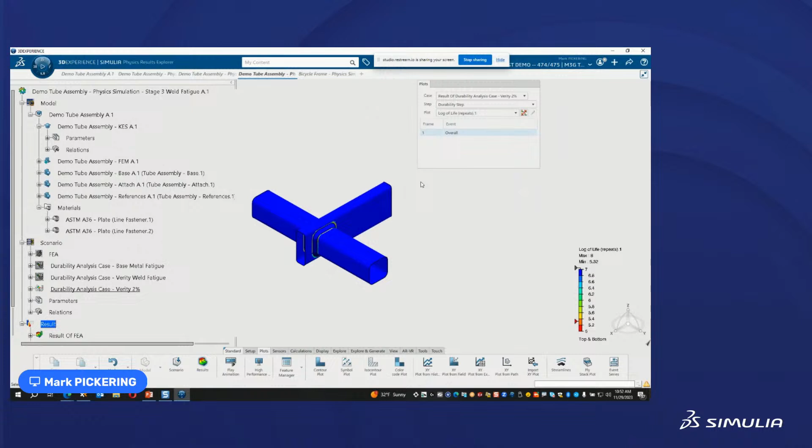And if I look at the results here, we'll see the same thing. Here I set one up for a Verity at 2% failure. Same idea of 5, so 100,000 cycles. Remember, it's the log of it, or log 10 of it. If 100,000 cycles is our limit at 2% failure, we're okay, but close.

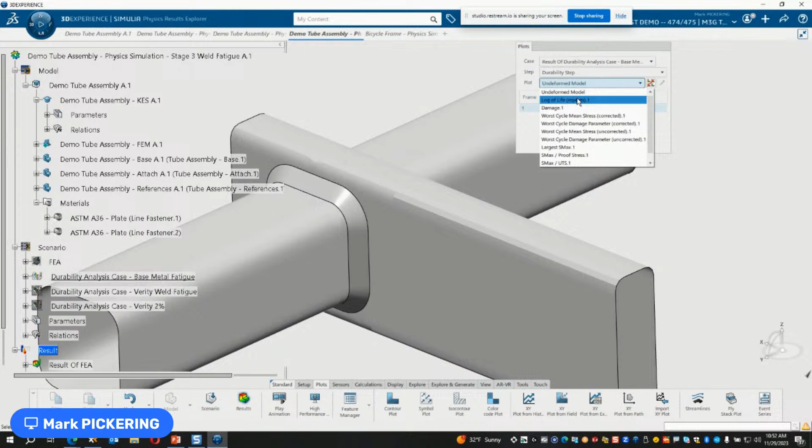If I swap to 50%, the default, okay, now we're at 5.8. And if I swap to base metal fatigue only and look at the log of life, okay, yeah, these were all over 6. So even though it highlighted from the FEA case, we knew this was kind of the critical pair of corners. From a base metal fatigue, we're looking well over 1 million cycles.

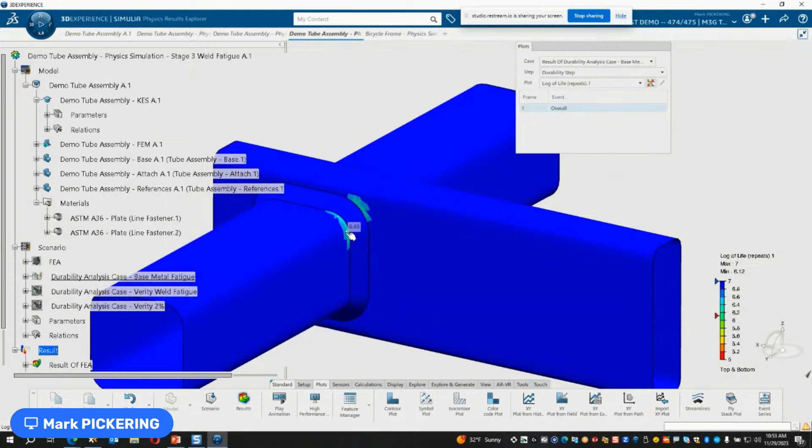As we include welds and as we include less acceptance of failure, we do bring this down, but we can still assess for this structure, for that loading of fully reversing 4,000 pounds force, would this live for 100,000 cycles? Yeah, probably. Certainly if we were allowing a 50% failure rate, almost certainly. For a 2% failure rate, if we're making millions of these things out in the population, maybe we want to thicken something up or change the profile or increase the size of these tubes to lower this down to whatever's acceptable. But we can analyze all of those cases.

So yeah, I think I'll leave it there.

The first thing that I was going to talk about was why we should talk about fatigue and not just concentrate on FEA, which we'll have to do maybe another time. I mean, fatigue, welds, connections, in an hour - it's so hard to cover such an important topic in such a short time. So thanks, Mark. It's like saying, tell me everything about FEA.

Exactly. Tell me. Yeah. But that's a great reminder for me. I think in a future session we should talk about just connections in particular, talking about how do I create these line fasteners and these weld connections, because we just kind of really skipped over that, which is such a great aspect of the software to be able to create all these different types of connections, and in particular welds, and then be able to use those welds in durability.

So again, Mark, thanks, man. Appreciate it. Fun chat with you.